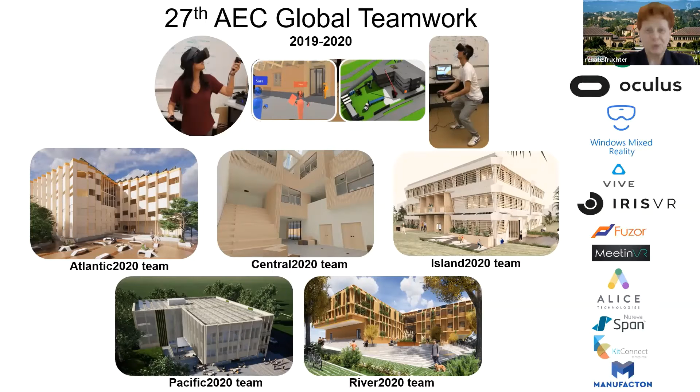That's great. So, hi everyone, we are Team River. Our group consists of Ida, the architect, Yanne and me, the structural engineers, Koske and Mina, our construction managers, and Julius, the lifecycle financial manager.

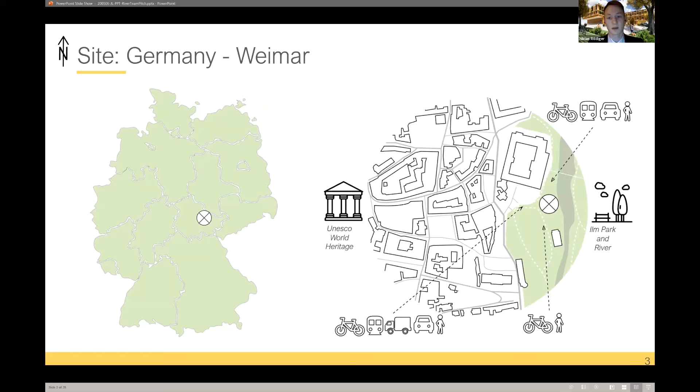Our site is located in Weimar, Germany. The area is a UNESCO World Heritage Zone combining beauty and history, with a lot of beautiful old buildings towards the city in the west and the big park with the Ilm River to the east. We have to fit into the surroundings and be aware of the site.

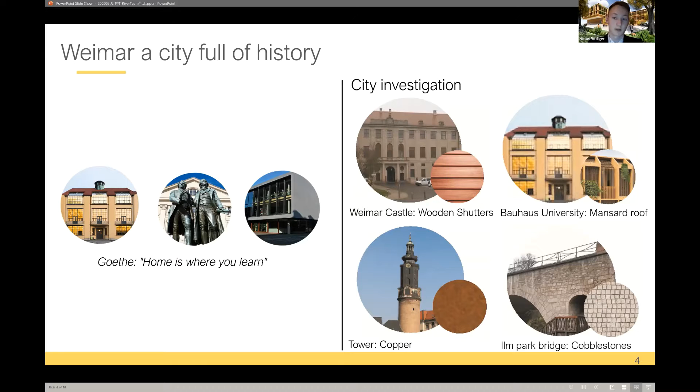We investigated the context to get inspiration for our building. We want to relate to the castle with its tower, the university building, and the bridge. We dealt especially with the materials: wood, copper, and cobblestone. In general, we learned that the city has a geometric typology, which we also want to achieve in a modern way.

We are facing a lot of constraints we had to consider in our design process, such as flooding from the river and the slope on the side. The existing chestnut trees were wished to be preserved. Additionally, we have a narrow construction site and streets.

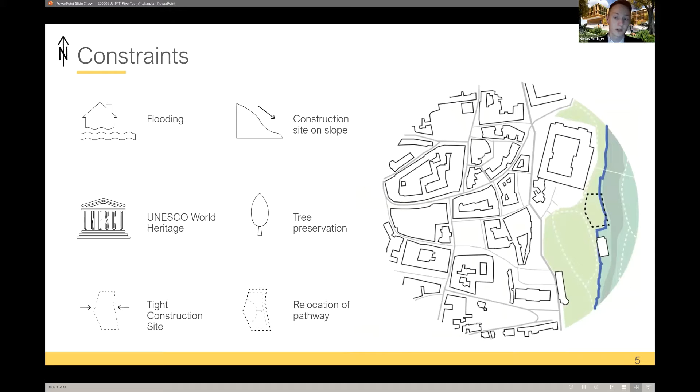Our goal is to achieve all three types of sustainability, and we want to do that by focusing on the users, being energy efficient, and implementing flexibility. Furthermore, we have the three challenges: resilience, DPR, and IT, which we of course aim to win.

So what are we designing for? We are designing for the users to thrive and learn in an innovative student environment. We are designing to respect and give something back to the context in Weimar.

We are as well designing for the building to sustain any changes according to the unexpected events in the future, and also to create the possibility to give the building life again with the needed purpose of a future day.

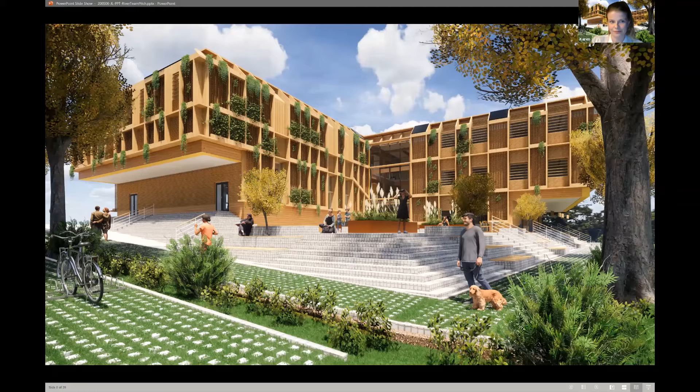From before the winter presentation, the design evolved from the concept Buttercup. And here you see our Buttercup building. The Buttercup is this flower that constantly relates to the sun and shapes its petals, so a warm and pleasant spot is created in the center.

This is the reason why the Buttercup is super attractive to the insects, embracing them as our building should embrace the occupants. The design evolved from the inside of the building to the outside.

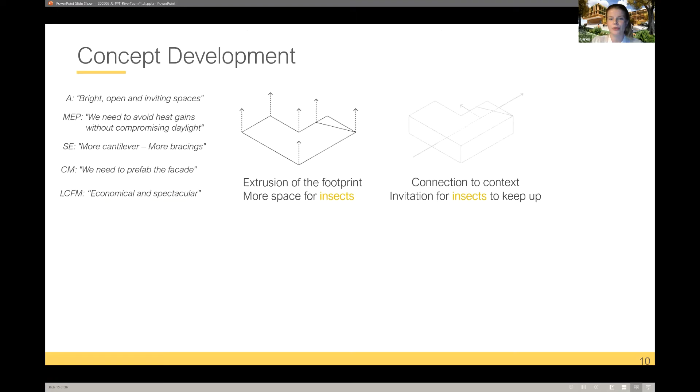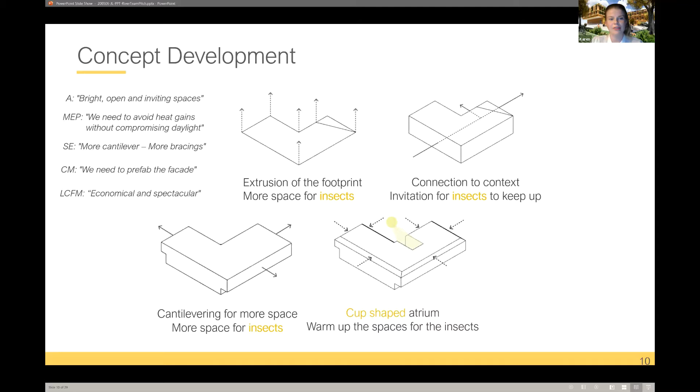Then a cantilever was created between the architect and the structural team. The atrium was created to have a warm and bright core for gatherings of the insects and to let in the daylight. The facade is a fusion of prefabrication, architectural expression, daylight, and heat gains.

At the first floor, we locate more public rooms and social rooms, and we have classrooms, an auditorium, and a cafe here. On the second floor, we have more workshop areas and group offices for the students. So this is mainly the floor for the students to be.

On the 1.5 floor, we have a big collaboration and flexible area and two large classrooms. This place is ideal for student presentations and creative work.

On the third and last floor, we mainly have space for employees. We utilized a few square meters from the offices to create some collaboration areas for socialization. We think that socialization is the key to achieve a creative, innovative, and collaborative work environment.

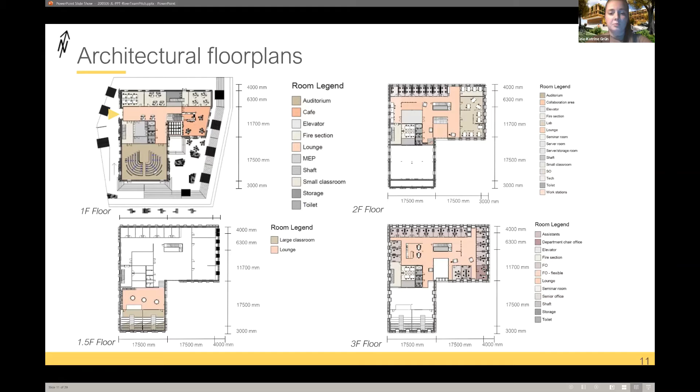And we created a nice break room with space for all the employees and a flexible space to work or to have a casual meeting.

Our structural framing is designed mainly in timber, as you can see. We have a concrete floor and 2 cores with CLT walls. What I like to point out here are 3 special features or places in the building.

First is the left side of the building where the auditorium is. Those dark lines on the plan represent the post-tension beams we put there. Then on the part of the large cantilever, we also have large beams which are continuous and provide backspan.

Trusses, where we worked together with the MEP, are mostly located in the common areas in the north between grid line A and C.

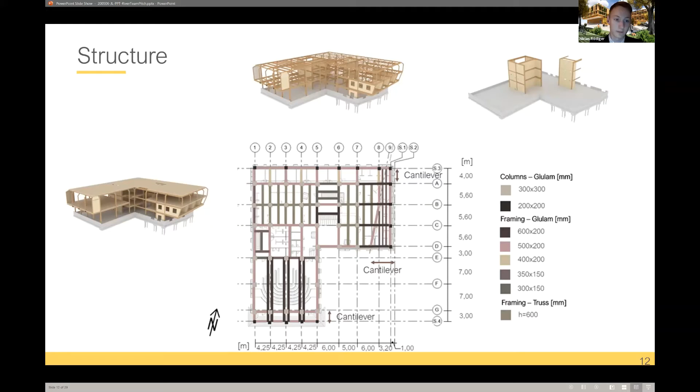The primary system in the building is a heat pump connected to solar panels on the roof. The building is mechanically ventilated through air handling units, and a water loop is created with rainwater harvesting on the roof. All the rooms have VAV controlled ventilation.

The large volume rooms are provided with displacement ventilation and are naturally ventilated from April to October. All smaller rooms have diffuse ceiling ventilation.

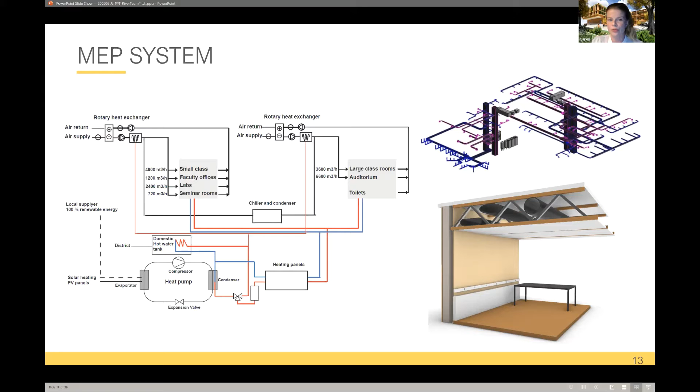Now we will welcome you into our Buttercup building through a VR tour.

So this is the main entrance of our building, and you see our west facade here, and it consists of some different elements. We have this grid, which is the architectural expression that we want from the city, and it's also due to the prefabrication on our facade.

We have these louvers on the facade, and they have a different expression on all the different orientations, due to reducing heat gains. Let's go inside the building.

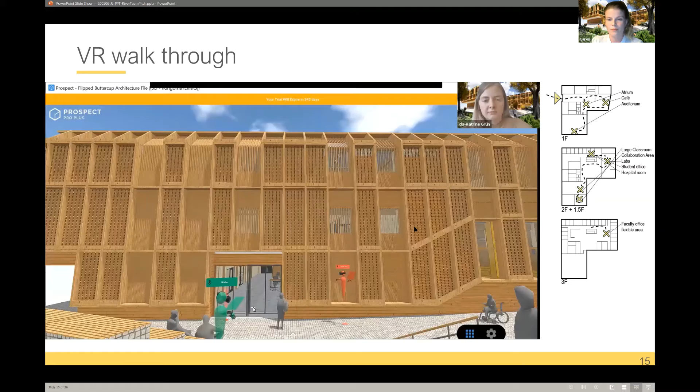So here you see how it looks when you enter the building. Now we will go to the atrium. The atrium has a lot of different purposes, so we can rent out the space. We can have it as a stage area in the summer, or a regular lounge as now, and also use it for presentations.

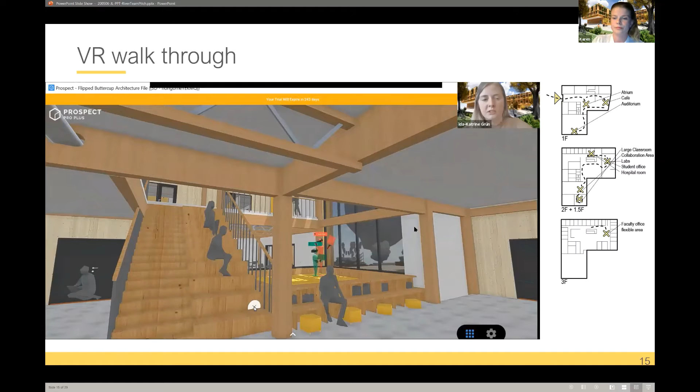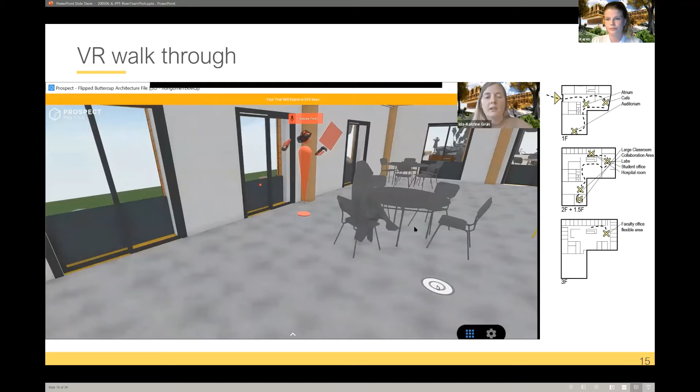Let's go to the cafe. In the cafe, you can, as an occupant, eat your food, and you can also buy some food. In this area, it's really visible that we're having some flood protecting walls towards outside. They are only activated when there's a third stage flood, and they protect us from the water when the water rises.

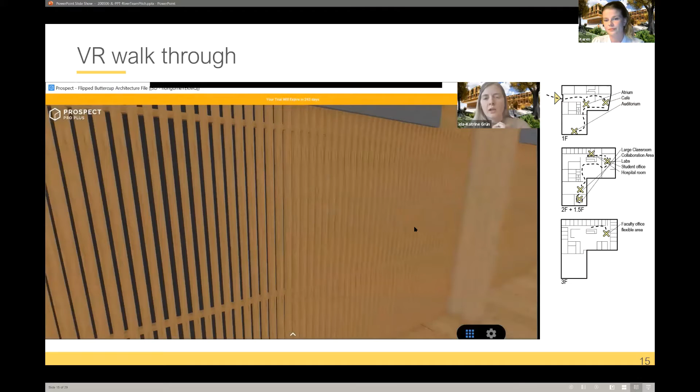Let's go to the auditorium. The auditorium is a room that is really future-proofed. We have a lot of different technologies that improve the study environment for the students. We have smart boards, completely good acoustics, sound screens, and tinted glass. And as you see in the ceiling, we have a post-tension wood structure, which is really good for this large span, and we have a really symmetric MEP system.

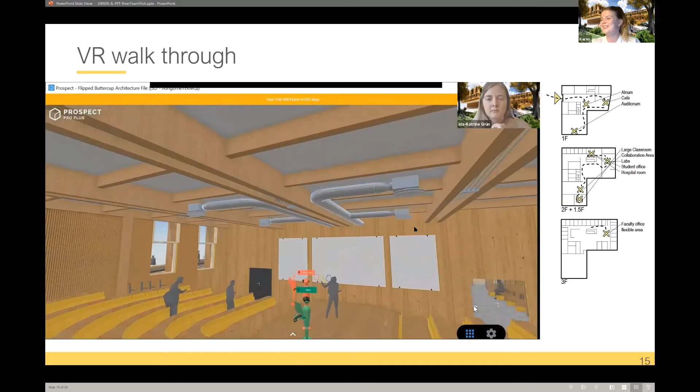Upstairs, we have the large classrooms, and we're utilizing the architectural height here by putting these two rooms on top of each other. As you see here, the louvers are different on the different facades. In the south, the louvers are horizontal, and in the west, they are vertical.

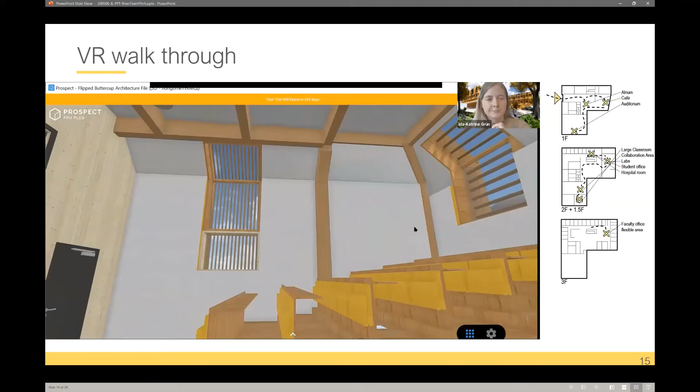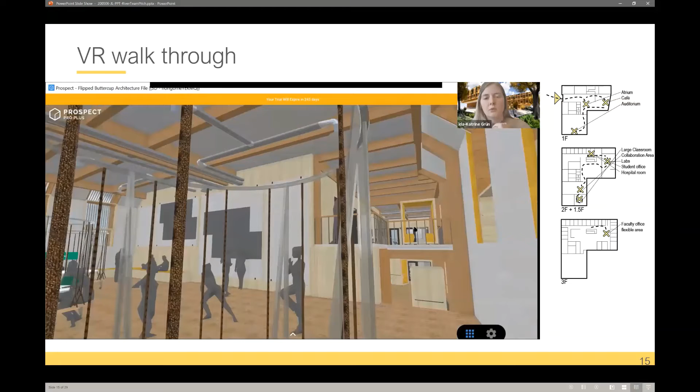Outside the large classroom, we have a collaboration area that we're calling the swing area. Here we also have the post-tension wood, giving us this large span with no column, so you can collaborate here. This bench we're having is to cover the displacement ventilation duct.

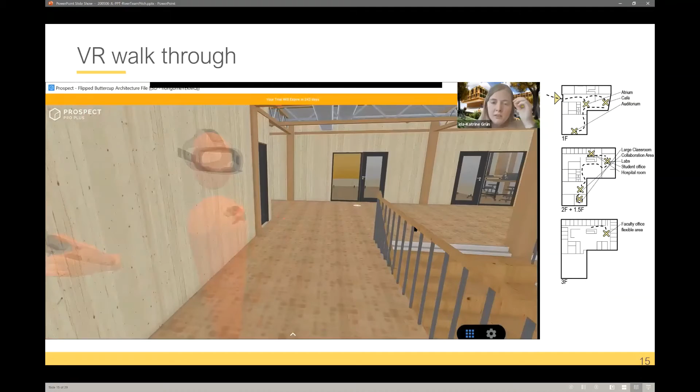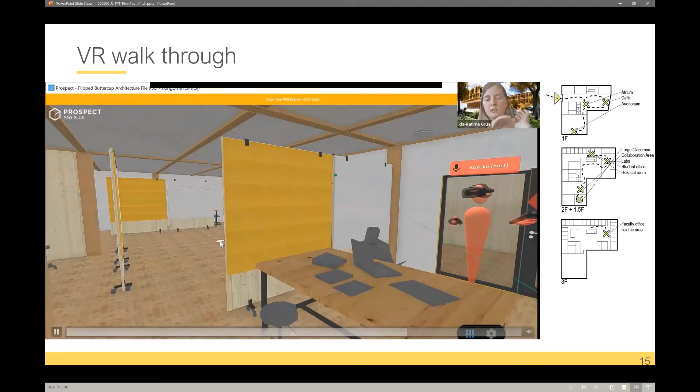Let's go to the labs, which we, together with the owners, actually interpreted differently. We did one big workshop area in the building, and put in some flexible furniture. For the future use of the building, you can move the chairs, the tables, and these dividing walls into a big storage room. We have a storage room instead of a server room because we use cloud service, so you can completely transform the whole space of the building.

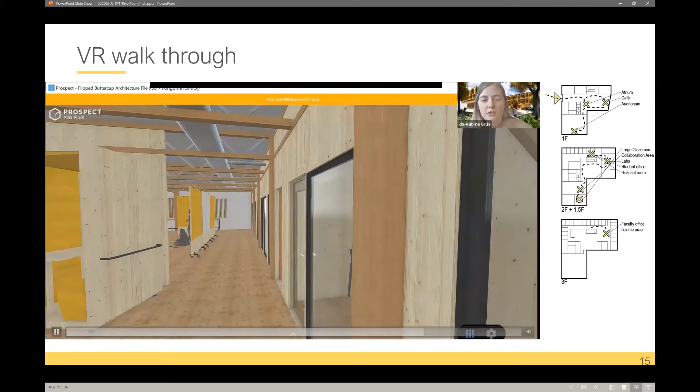If we go out of the room, we can show that we have some student offices outside here. In the future, we really want to adapt to giving shelter, so our building can transform into a hospital. As you see here, one of the student offices is turned into a hospital isolation ward, and our whole building can help the community in case of a pandemic in the future.

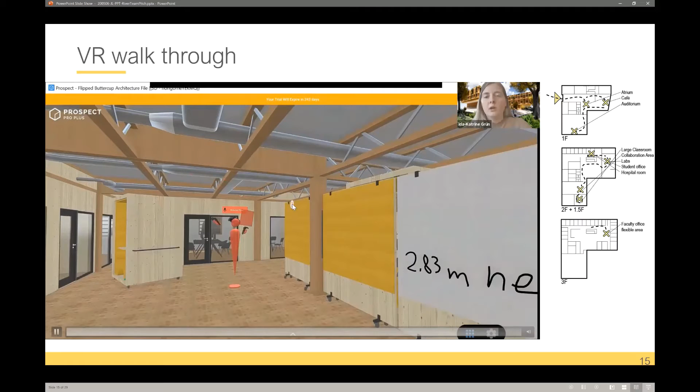If we go upstairs, we'll go to the top floor of our building, the third floor. This is mainly for the employees of the building. Here we also have offices, and a collaboration area outside the offices. In the ceiling in this part of the building, we have wooden steel trusses, so the MEP can be integrated with the structure, and we can still reach a pleasant architectural height of 2.83 meters while having 3 floors here.

In this section, you get a quick summary of the parts that make up the whole Buttercup project. We have different flood protection implementations from the bottom level of the building to the roof. You also see some of the spaces where the disciplines had to work closely together to create a well-functioning building with room for well-being.

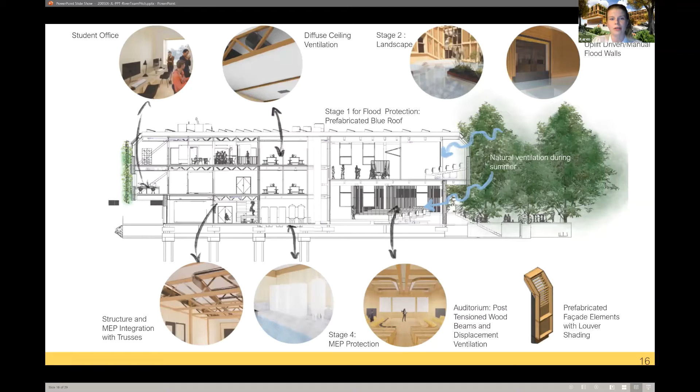As we experience right now, and as has occurred for centuries, extreme situations can suddenly strike without any prediction, whether due to pandemics or climate changes. That is why we felt the necessity to embrace new ways of thinking in terms of being reactive and predictive to the future when designing our building. Our design aims to be as flexible as possible to easily respond to the changes that will affect the whole population now and in the future.

When people feel sick, they can come and get a test at the university and be taken care of in the right settings. Our Buttercup building should be a place for recovering and well-being of affected occupants. So we have to make sure that we are separating the patients between stage 1, testing, stage 2, care in the patient ward, and stage 3, sick in isolation or step-up care.

The test area is in our auditorium, where you have direct access from the outside. The cafe will be utilized as the kitchen. A patient ward will have 10 square meters for each person, located in the 1st and 2nd floor. As you move up in the building, the more isolation rooms we have.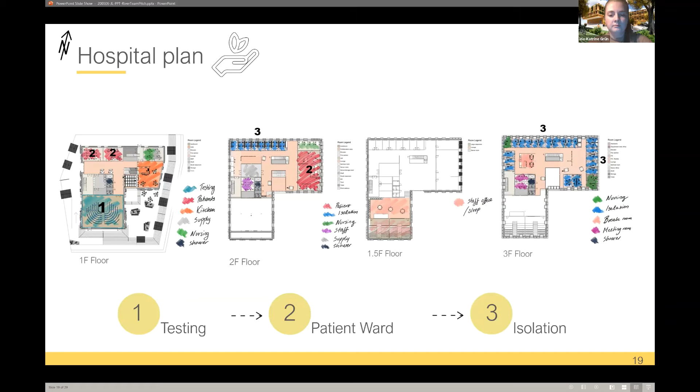To be able to fulfill the ambitious hospital requirements, we created flexible ducts that are more movable and allow flexible ventilation. The installed VAV control allows a negative air change rate. With an installed HEPA filter, we can ensure that germs are not transmitted through the HVAC system during a pandemic.

In times when the building is used as a university, this is also helpful during flu and pollen season. We have easy to clean surfaces all over the building and hand sanitizing stations to ensure a healthy environment for hospital and universities.

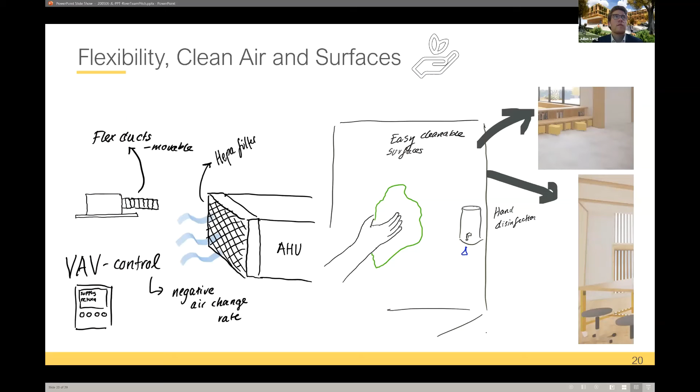We are a private-public partnership. In our case, we construct a university building and operate it in exchange for an annual rent. But are we also a hospital?

As discovered recently, the building can't be used as a university during a pandemic. In this case, we will hand over the building to the public health system. This helps us to compensate the loss of rent from the owners and to cover the peak demand for hospital space. We also calculated the number of days it would take for an emergency transition to hospital.

Since there's no need to change the room layout, most of the work will be MEP works. But since necessary MEP works are already designed to work at the time of construction, the work can be minimized and completed within 2 weeks.

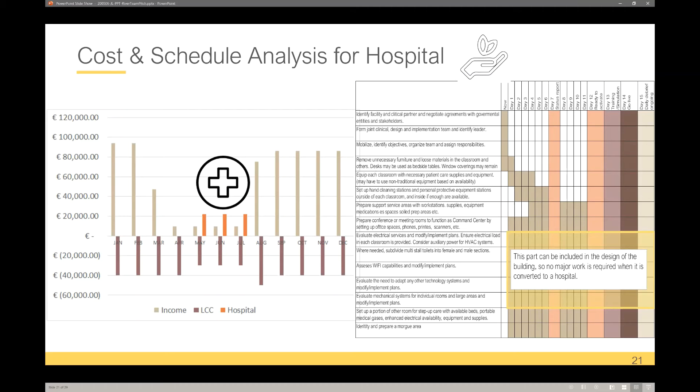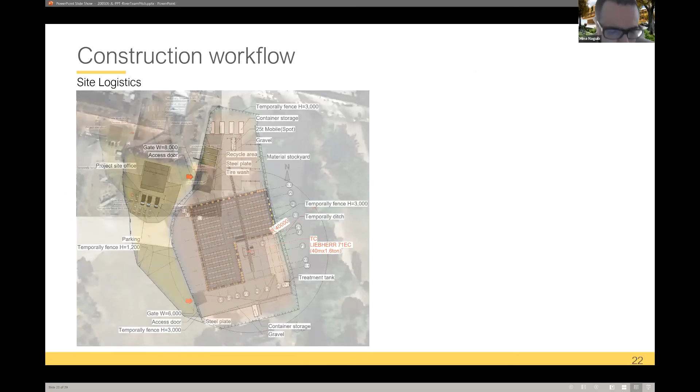Moving forward to how this building will actually happen, as a reminder, our building just fits into the site and there is no space on both the east and west. So after considering all our constraints, we generated the schedule using Alice and found the optimized schedule that has the minimum cost and time with the maximum utilization.

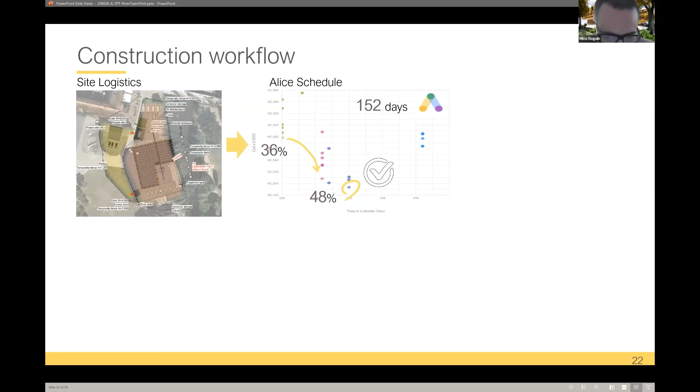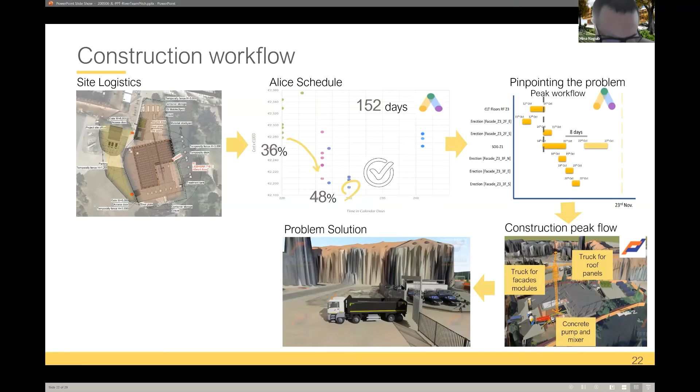We also use Alice along with VR to pinpoint the construction peak flow. On October 14th, we found that there are 3 activities occurring at the same time that require hosting 4 equipment at a time. Due to our constrained site, that would create a bottleneck. So we plan to push one of the activities that doesn't lie on the critical path.

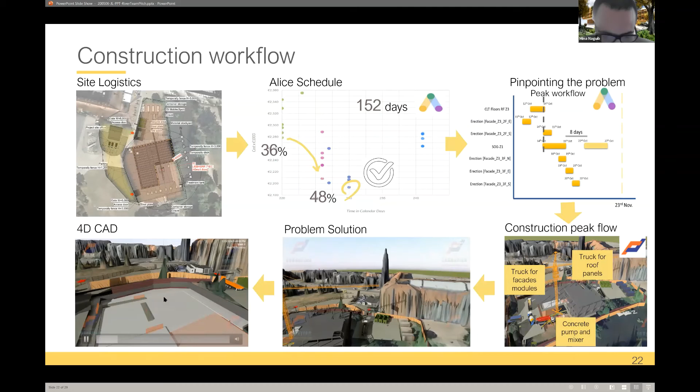So after adjusting our schedule, we import into Fuzor, which will generate a 4D construction schedule.

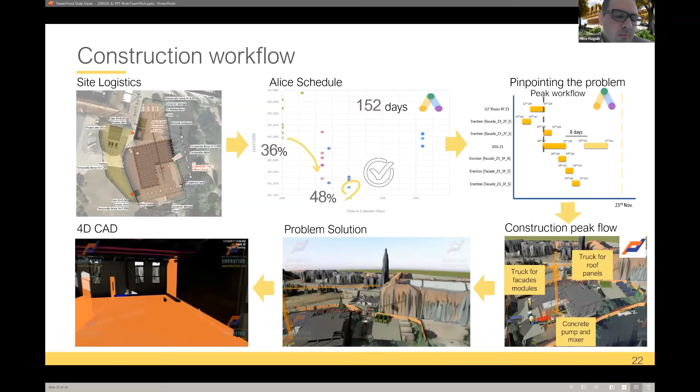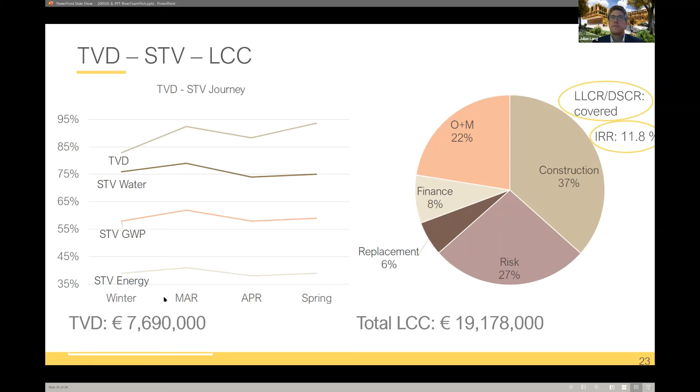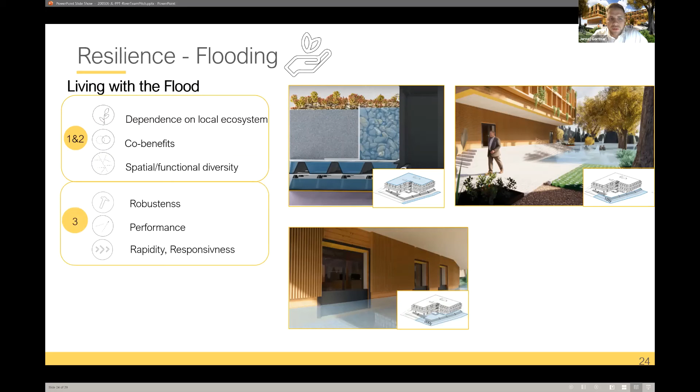For stage 3, we use reinforced concrete walls with lift flood walls that help in case of a 200-year flood. Stage 4, with the right selection of materials and MEP protection, helps us stay safe from extreme events and reduce disturbance during the operation phase.

We choose our response to benefit building users, the local ecosystem, and to increase the performance of the building with a redundant response.

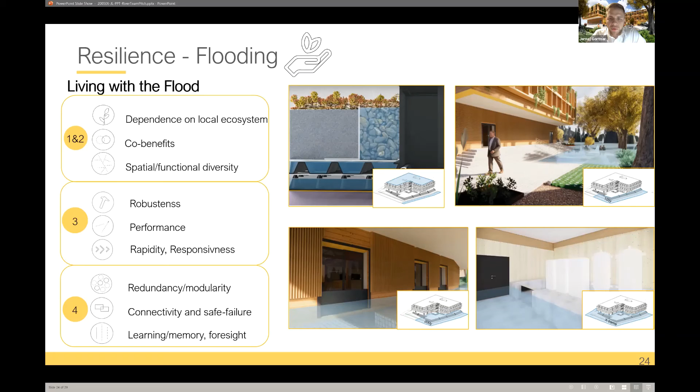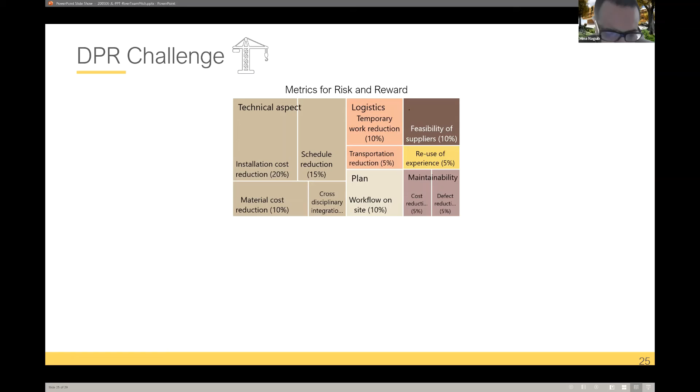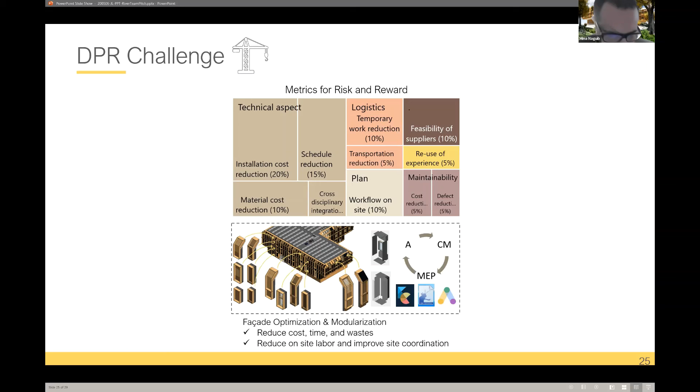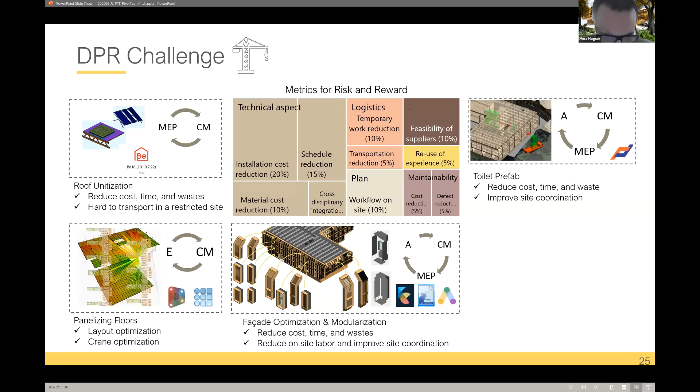We also did a study to prefab the toilet box, where all finishes and sanitary fixtures are installed off-site and delivered as a box during structural work. In addition, we studied optimizing floor panels according to crane location and cost. Last but not least, the flexible walls are planned as pre-finished assemblies to minimize the amount of installation work.

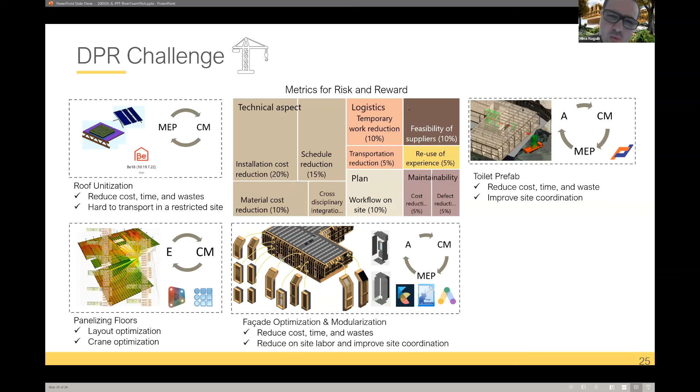Also, MEP and structure design iterate on the size of ducts and beams, and performance.

It's okay, lost IT... can you hear? Can you hear me now? Yes, we can. You are back.

Okay, go ahead. Structure system coordinated parametric analysis of construction to find the best design and plan.

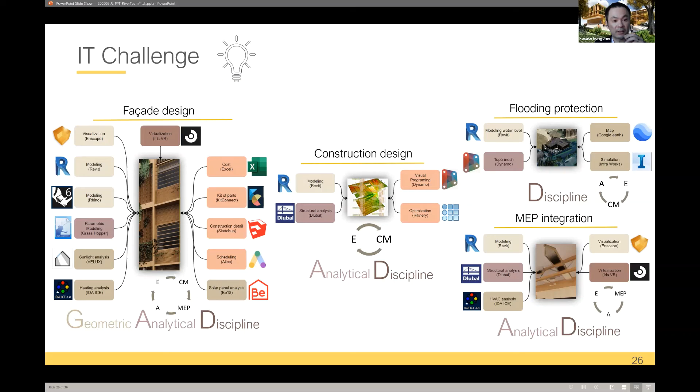We created a digital pull-planning at the beginning and converted it to Asana tasks. This allows us to proceed efficiently with each individual task. Dependency of each discipline significantly improved in the spring quarter by knowing what others really need.

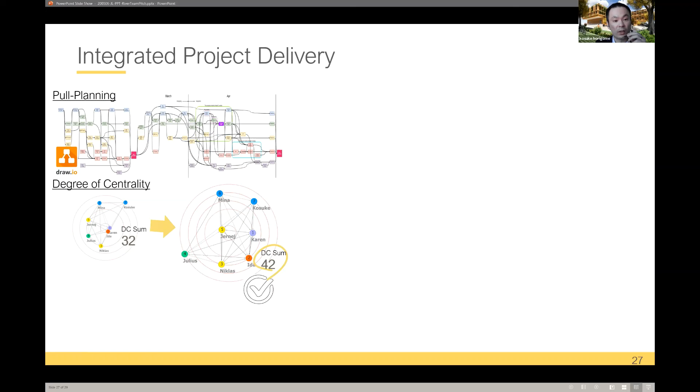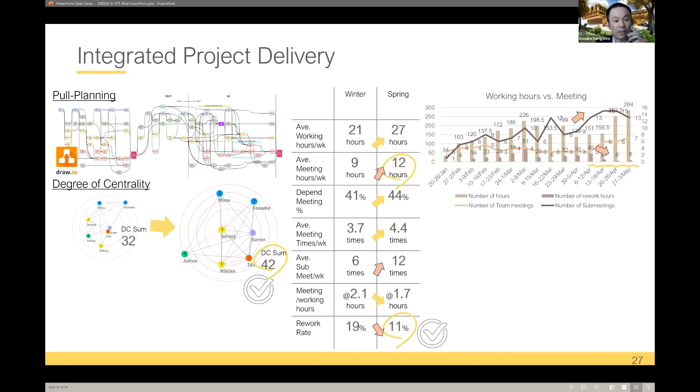Degree of centrality became well balanced and resulted in our great project. Working time records clearly show increasing meeting time and reduced rework rate, particularly after we started daily stand-up meetings. Asana task records show 411 tasks were completed in 2,500 hours total.

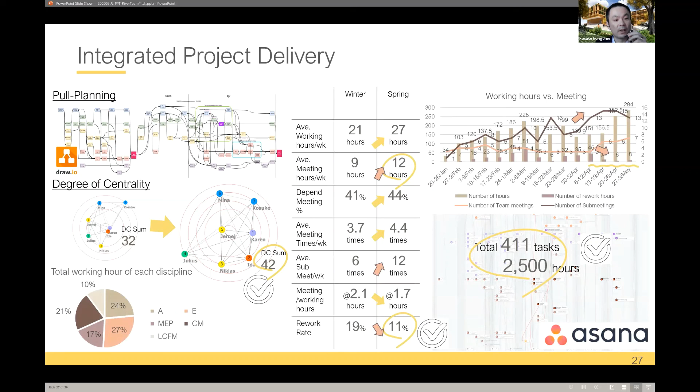We believe this project turned out to be an invaluable experience for our careers.

Throughout the project, we learned that a project is never completed by one person. We also experienced that distance can be shortened by technology, and it will not be an obstacle for our generation. We thank all our supporters for the project: owners, mentors, and additional supporters from the industry.